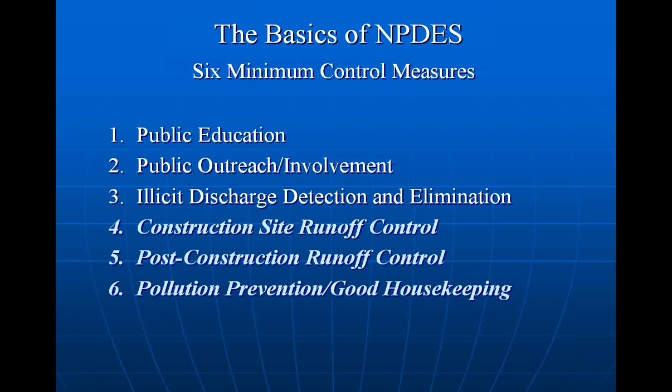We know the NPDES Phase 2 summed up water quality with their 6 minimum control measures, which is public education, public outreach and involvement, eliminating illicit discharges, construction runoff control, post-construction phase runoff control, and water quality being included in that, obviously, and then pollution prevention and good housekeeping.

Low-impact development means a lot of things to a lot of different people. This definition is off of the low-impact development site, and it says that low-impact development is a comprehensive land planning and engineering design approach with a goal of maintaining and enhancing the pre-development hydrologic regime of urban and developing watersheds. This is to be accomplished while meeting the water quality goals dictated by NPDES rules and regulations.

And the two subjects are actually complementary, but it's important to understand, and for those of you who've been here before, I'm going to try to use the highlighter pointer here. This thing has a way of making my menu disappear, but I want you to understand maintaining and enhancing the pre-development hydrologic regime, and this is not as simple as doing detention. So it's something we need to think about.

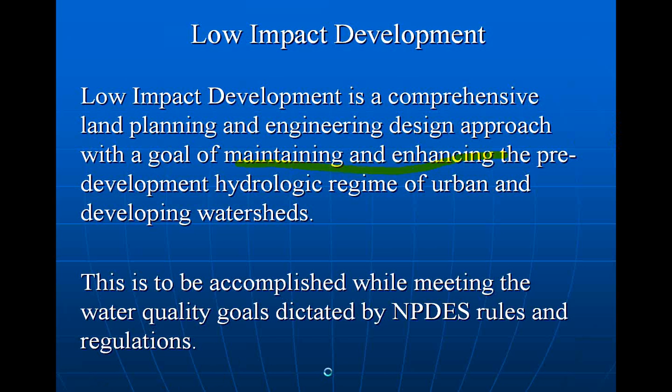So the main goals of LID are to match the pre-development conditions for quantity and quality. For those of you who aren't necessarily familiar with these terms, quantity is the total volume of water that runs off a site. And quantity also can mean the rate of runoff, and we'll break these down a little bit. And water quality, of course, is the contents of the water, which is usually degraded when we develop a site. So you want to have the volume of runoff, which would be maybe 20,000 cubic feet detention in a pond.

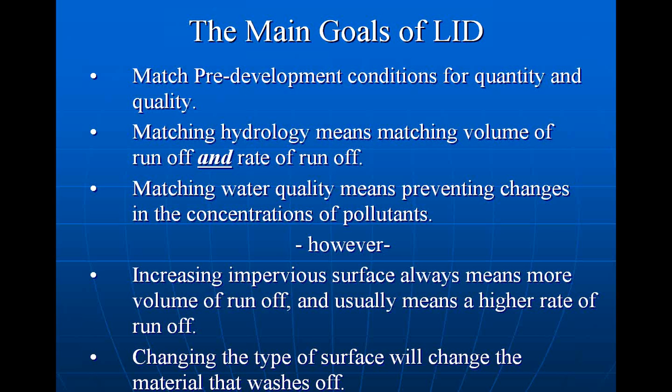You think of that as the volume that you're holding, but really the volume of runoff changes as sites develop, and that's why we have ponds. But the ponds are there to control the rate of runoff. So what we want to do is prevent changes in the concentration of pollutants for water quality. But every time we increase impervious surface, that means there will be more water runoff. I'm going to show you how that's figured. And it also usually means a higher rate of runoff, that the water will run off faster. So changing the type of material of surface, of course, will change the type of material that washes off.

Most hydrologists and engineers believe that about 95% of the water that falls on an impervious surface will run off. Just to take a little short rabbit trail here, they're talking about the annual runoff rate. There's a thing called initial abstraction when we're using a TR55 or SCS method of calculating runoff. And essentially it means that there's water that evaporates when it hits a warm surface.

There's water that's caught on the leaves of trees. Every kid has probably stood under a tree, when it's not lightning, during a storm to kind of stay dry. So the 95% is not every storm every time. And of course, when a surface is saturated and it's a heavy runoff, the runoff is probably closer to 98% or maybe even 100% or close to 100%.

So, in developed landscape areas, about half the water runs off. This would be a constructed lawn where the surface has been prepared and sod was put down. It might be less than 50% for an area that's been planted with trees, might be more on a lawn that was well compacted underneath. But on undisturbed forest land, only about 20% runs off.

So we like to use things called C factors and percentage of runoff, but essentially when an inch of rain falls in the forest, annually about 2/10 of an inch runs off, about 1/5. And it could be as low as 1/10. This is part of the, I would call it art or magic of doing hydrology. Different engineers have different opinions, and they talk about how long the storm takes to run off. But that's why you'll see a variety, and why hydrology is an inexact science.

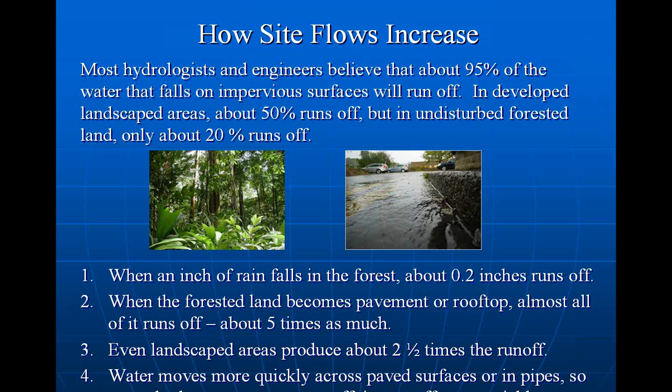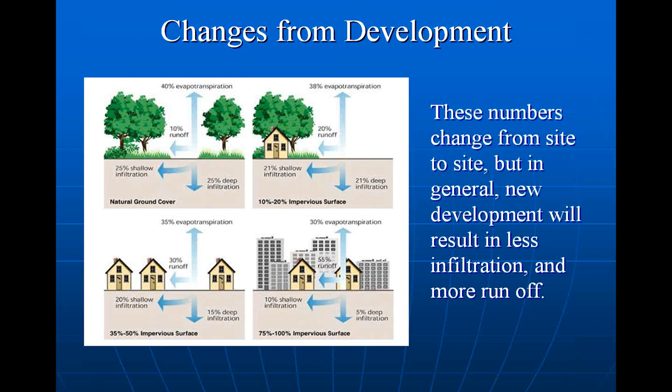Now, through the 70s and 80s and up through even today, we gathered this extra water and we detained it. That's where the word detention pond comes from. Sometimes you'll see detention and retention, and actually they're two different things. A pond that retains the water on site is retention; a pond that detains slows the water down.

This is an example of a pond, and essentially there's what we call a V-notch weir. A weir is an element that controls the flow of water. It could be a broad wall. It can be a hole or an orifice. It could be a standpipe. There's all kinds of things that control flow.

But this particular V-notch weir is done so that as the water gets deeper and there's more volume being stored, that would indicate there's more flow that has come into the pond. The V gets wider, and so more water can flow out. This is a way of what we would call matching the rate of flow. Small storms have small flow, and a V-notch weir with its small area on the bottom would let low flow off.

So you kind of match the pre-development rate of flow. Rate of flow means cubic feet per second, not cubic feet, which would be the volume, or cubic yards or gallons, or however you want to look at it. But the rate of flow can be matched this way. In bigger storms, the pond gets deeper, and the outlet control device allows more water to flow out.

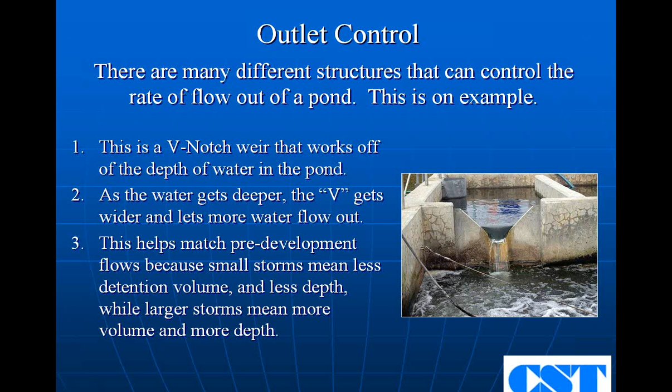There's quite a bit of attention paid on sites to the outlet control structure on a detention pond, to keep the same rate. And why would you keep the same rate? You'd keep the same rate because there might be a culvert downstream, a 24-inch pipe under a street, and you don't want to overload that pipe by having a greater rate of flow. There may be a swale that goes to it. You could have a neighbor that's used to a certain flow coming off of his property. So the requirement to match the rate of flow has been around for a while.

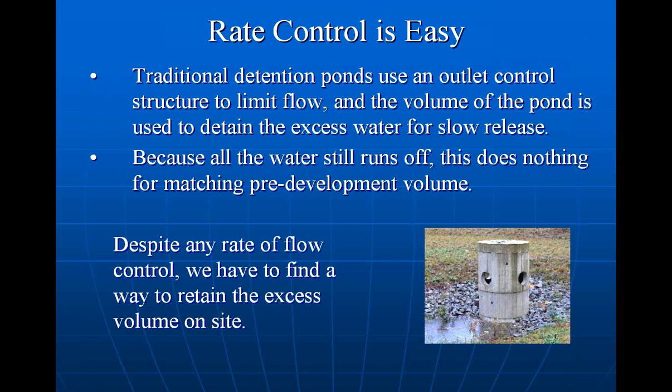And matching the rate control is actually pretty easy because there's vertical slots, there's a thing called a Cipolletti weir, there's circular weirs, there's a lot of ways to use outlet control. And then if you match the rate of flow off the property to the pre-development rate of flow, which the engineer determines using the type of surface and the amount of tree cover and other things, hopefully he gets the rate of flow the same, leaving the property. But because the rate's slower, volume builds up, and that's why we have pond volume. So if we're going to control volume as well as rate of flow, we've got to find a way to use water on site.

So there's another problem, though, with simply matching the rate of flow. You do catch some gross pollutants and some sediments, but even though the rate of flow, let's just say 5 cubic feet per second, matches the pre-development flow, because this pond is storing water and more water is running off, maybe 5 times as much, that rate of flow will last 5 times longer. As that extra volume of flow reaches the stream, it has an impact on the stream. And we'll talk about that a little bit more, but essentially you're putting more water in the stream. You may be putting it in there more slowly.

There's some pretty nice techniques that talk about where you are in a watershed and how long you should hold your water, and whether you should release it over a longer period of time than just strictly trying to match the rate of flow. Also, the amount of time water spends in a pond, if you simply match the rate of flow, is a relatively short period. Let's say a storm lasted an hour, and because it takes 20 minutes for the water to get from the top of the basin to the bottom, the entire flow lasts an hour and 20 minutes. If you've got 5 times the water released at that same rate, you might end up with 5 times the amount of time for that storm to release, say 6 or 7 hours.

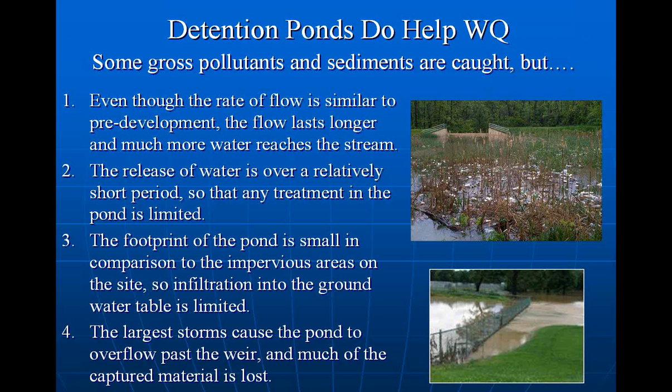When the big storms come, usually you will hold maybe a water quality storm, which might be 1 inch first flush, and you'll hold it for 48 hours. But if you get a 4-inch storm, those last 3 inches go out over the weir. And so the larger storms, when they come into a pond that has low energy, can stir up mud and trash and debris, and so you can lose a lot of material.

So a detention pond, certainly one that's not set up for water quality, can't do anything about the volume of water, 5 times as much. It might not do very much for water quality. In fact, it might even degrade water quality depending on how the pond is built and what the energy gradient is across the weir. So jurisdictions are going to require detention, and it's a good practice. It's the right thing to do.

You want to do it to protect nearby properties and pipes and swales, but it cannot really address water quality problems per se. There are credits given because we watch these ponds silt out and we see them fill with hydrocarbons sometimes and trash and debris, so it's having some effect.

But as a larger percentage of properties develop across a watershed, more and more water reaches the stream. And I say sooner or later. Normal detention, maybe it's 5 times as long as it might have taken to reach the stream before because it was detained. Maybe it's 2 days, but still there will be more volume of water getting to the stream. Also, that water tends to hit the stream faster. Pre-development flows were smaller, but they took longer.

So with pre-development, more of that water is infiltrated into the ground, and we call this a base flow to the stream. This is water that goes into the saturated zone, into the water table, and migrates horizontally to the stream. So you get some stream flows even though it hasn't rained in 2 or 3 days. You'll get some flow support into the stream. So when you get the higher volume of flow into a stream immediately after a storm and almost no infiltration, you get no base flow for the stream.

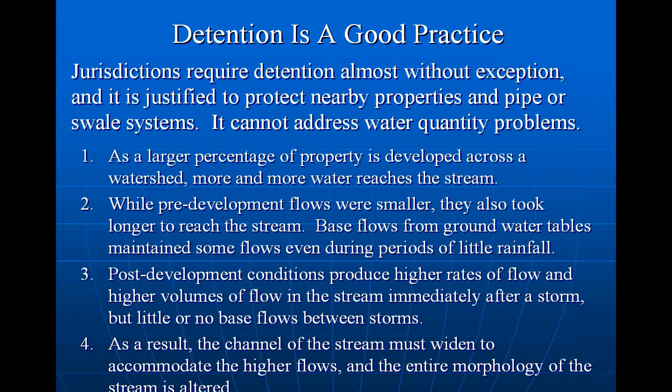So when you get that higher flow for relatively short periods of time relative to what happens when the water infiltrates and goes through the water table, days and days and days to get to the stream, the channel has to widen, and it has to accommodate these higher flows. And the whole shape or morphology of the stream has changed. So rate of flow is not a problem.

In fact, many BMPs have been shown, tested. Now, some of these are manufactured. There are others that have been shown to be very effective. I say manufactured. All of them are manufactured. I use manufactured to mean proprietary manufactured devices. But many have been shown to be able to effectively remove the pollutants that are concerning to us in water quality. But almost none of them address the runoff volume problem, even underground storage chambers and pipes.

Volume is the challenge. So manufactured solutions can help with other problems, but can they help with this volume problem also? It's a physical problem. There's too much water and only a few ways to use it on a site. So if you're going to reuse the water on site, there are some fairly common ways, but you have to be aggressive and effective in your pretreatment. You can't have trash and debris and all sorts of vegetative material and sticks and gravel going into most of these uses for reuse on the site. And you have to accommodate a way to store that water.

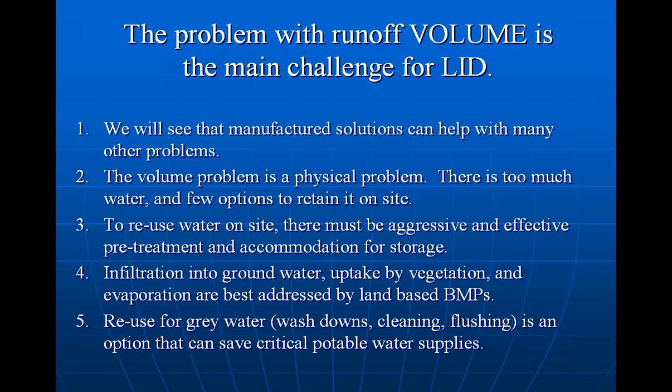So infiltration into the ground, uptake by vegetation, which will then allow the plants to respire, for the water to come out as water vapor, and evaporation are best addressed by land-based BMPs, not manufactured proprietary BMPs. Reuse for gray water, that would be washdowns, cleaning, flushing, and irrigation. These options can help save critical potable water supplies. In other words, all the water you're using for irrigation, flushing toilets, or cleaning or washdown, which goes into the sanitary sewer system, saves buying water that is treated for drinking water purposes.

So here's the challenges. Stormwater is dirty. Rainfall is chaotic. I'm showing a picture of a storm here that's getting some awesome rainfall on the right side and not so much on the left side. And this is the way storms work. It's difficult to control the source of trash and debris when a site's being used by the public. It's also hard to control the flow, to understand what the flow is going to be two properties a block apart, much less a state apart.

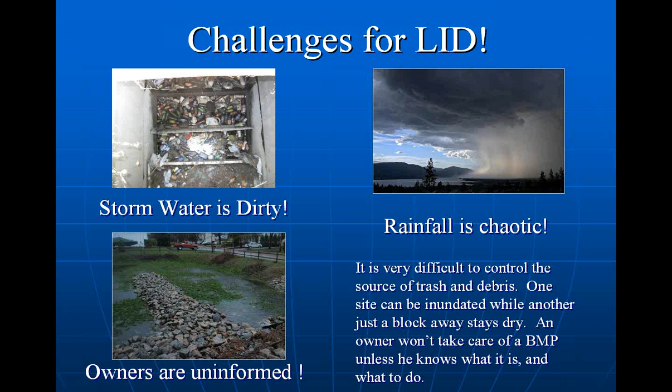And owners are uninformed. Owners don't know what a BMP is, and I could give you many stories about having seen these in the field. They don't know what it is, they don't know what it's for, and they certainly don't know what to do with it. This includes individual property owners and homeowners associations or merchants associations. So going over the stormwater is dirty piece. Whether you're infiltrating, irrigating, or reusing water, you pretty much have similar needs. You want the water coming to them to be free of excessive sediments and gross pollutants.

That's a challenge, but gross pollutants and sediments have proven to be relatively easy to control. This can be done with a manufactured treatment device. There are public domain solutions that can also accomplish this. Sometimes these manufactured devices only have a manhole or two in a parking lot on the site.

They're under an area that has another use. That would be maybe parking or landscape. So it's not using up area like a pond might, where you certainly can't park in a pond. Might not want a landscape in a pond, depending on whether you're trying to plant some hydrophilic plants that'll help out your pond.

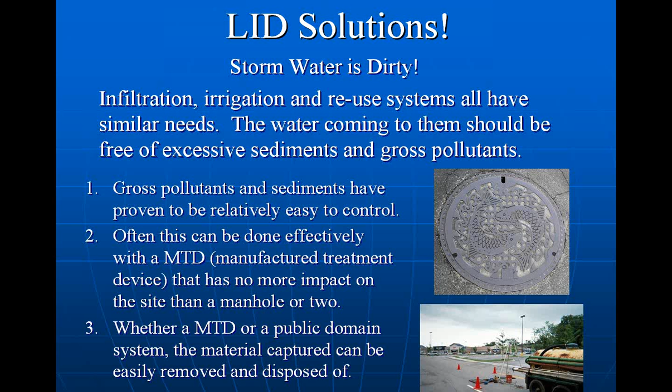But whether it's a manufactured device or a public domain system, if it's well designed, the material capture is pretty easy to remove and dispose of. So there are some things that are extremely hard to clean, like bioretention and constructed wetlands. Rain gardens and some other things might not be so simple if they're impacted with oil and hydrocarbons and trash and other things. Not quite as simple to clean a wet pond, for example, as it would be an underground vault.

So we know the rainfall is chaotic. Infiltration is slow. So when it rains at a rapid rate, rains hard, infiltration can't keep up with it necessarily. Bioretention usually has limited storage before it goes on overflow. And then reuse systems, like a cistern, they have to hold enough water to provide for irrigation and other uses.

It's ironic, a cistern, which is used to irrigate landscape, is nice, but when it gets full from a storm, you just had a storm, and you don't necessarily need the water that day. And when you have a prolonged drought, the cistern is not likely to be full. So you have to be careful how you size a cistern to actually have water when you need it. And there's a lot of techniques where folks are using potable water to supplement the cistern. And if the cistern's full and you get a storm, you're going to, quote, waste that water.

So large storms can be problematic for all of these things. So when these things don't work well because they can't take a large flow, you generally have to go to a detention or some sort of storage where you may have a reuse at another time. Small storms, of course, may not give you enough. And irrigation is a nice concept, obviously.

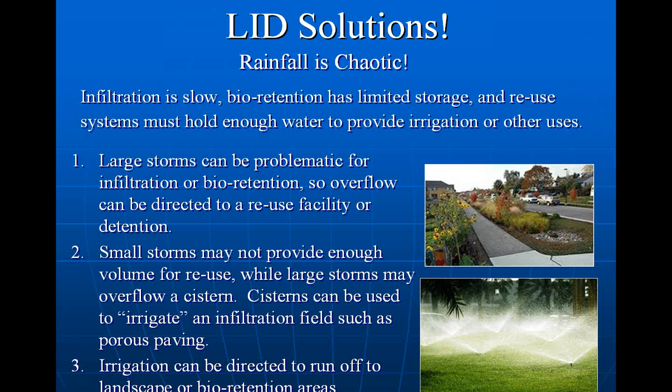There's a lot of things you can do to, quote, waste that water or delay that water and put it into a slow draining system, such as might be under paving. So there's other things you can do with your water to use it as opposed to directly using it for irrigation.

So if you look at the stormwater manuals, I could refer to Georgia or Tennessee, Maryland, Virginia. In most areas, they pick a 1-inch first flush. I think Nashville's 1.14 or 1.2 in Georgia. There's a couple of different things, but what they're looking for is they want to take all of the 1-inch storms and account for 80 to 90% of the rain that falls every year.

Now, I'm using 50 years of rainfall data from Atlanta, Georgia, Atlanta Hartsfield Airport. In that particular database, only 65% of the storms are 1 inch or smaller, okay? When I say 65%, I'm talking about 65% of the annual volume is contained in storms that are 1 inch or smaller.

And you go, well, so 1 inch won't make the 80. But a volume-based BMP, a pond, for example, is also going to catch the first inch of all the storms over 1 inch: 1.2 inch, 1.5 inch, 3 inch, 4 inch. When you add those inches for the larger storms, in Georgia, that comes up, I think, to about 87, 88%. But the point I'm making is on a volume-based system.

Now, most manufactured devices are flow-through, so you can keep that kind of in the back of your mind. That 1 inch first flush is a pretty good approximation of holding 80 to 90% of your water. Let's use 80 as a worst case. If you remember, forested land only has about 20% runoff.

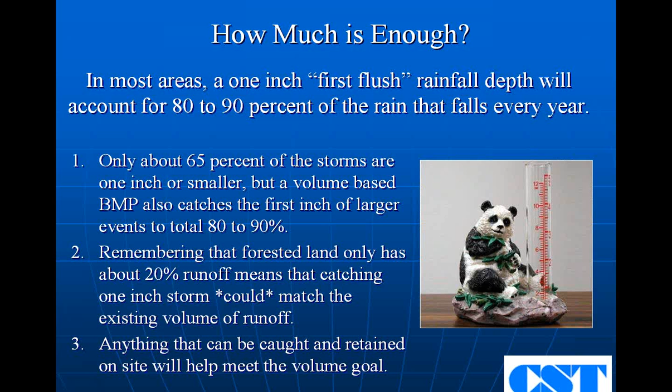So if you did catch 80% with a 1 inch first flush, you could match on an annual basis the existing volume of runoff. That might not be good in individual storms, but the point I'm trying to make is this: our first flush volume is probably a pretty good starting measuring point for what we want to catch, hold, and reuse to duplicate volumetrically what used to happen on the site before it was developed. So anything that can be caught and retained on site can help meet that goal.

There's some simple things. On what I would call tough commercial sites, that would be highly developed hotspots, the rooftop is 30, 40, sometimes even 50% of the impervious surface on the site. The solution of a lot of folks is to take that water and run it across a parking lot. The water is relatively clean coming off of a roof. There's some atmospheric deposition of nitrogen. There's other things, smoke and debris and fly ash and all sorts of things could settle on a roof. But by the way, that also settles on the impervious surfaces like the paving and other things, including landscape.

The point I'm trying to make is that water's a bunch cleaner than most of the water that would run off of a parking lot. Probably not full of trash and debris, and probably not full of vegetated trimmings and material, although a tree over a roof could do that. But that water would be the first water to use to fill a cistern for irrigation or for secondary uses like wash down or cleaning. It could replace potable water, drinking water, which would save some money on an ongoing basis, certainly, if you're not buying the water.

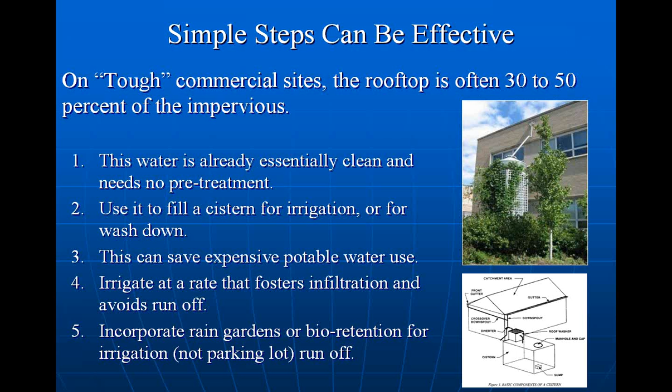And if you had a cistern on overflow, you certainly could direct that the same way you would pump it out on your lawn. You can certainly direct it to a bioretention area or to an in-ground infiltration where you might be able to utilize that water to get the benefits of evapotranspiration and some other things. So there's other places that aren't so simple. I think roofs are pretty simple, really, and they are highly unused.

A lot of good engineers today are carefully piping their roof drains so they don't have downspouts, but you know, the first thing they do is find the nearest manhole and commingle it right back in with the stormwater. Yes, there is a cost associated with some additional piping to segregate that water, and yes, there's some cost associated with storing it. But I've seen many systems where they are essentially storing as clean of water as they can coming from their roof.

And by taking that 30 or 40% off of the drainage system, not only are they doing good water quality, they're downsizing their pipes, they're downsizing their pond. And so this can be a winning proposition, not a losing proposition. Sometimes all anyone can see is another 100 feet of PVC pipe. But the benefits of not using potable water are long-term, and there can be direct, immediate benefits to downsizing the pipe system on a property.

So some of the areas that aren't so simple, this is where we start to look at how manufactured products might be able to help. The water that comes off parking lots can be full of pollutants, and it needs pre-treatment. The things that do really well at storing water and at infiltrating water and using it for bioretention and getting it to plants definitely do not need dissolved metals, hydrocarbons, tons, literally tons.

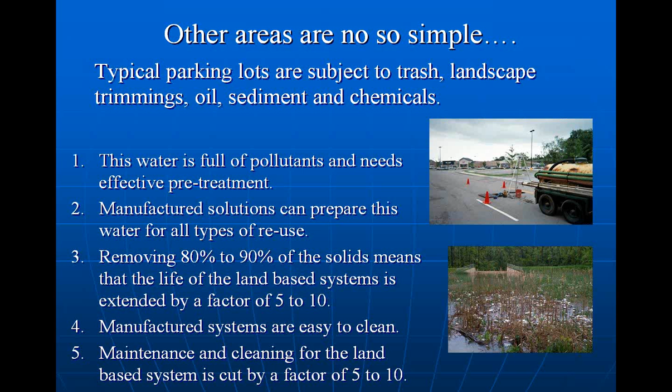So if you're looking at LID and you want to do LID, it's a great thing, because remember, it does the things that a manufactured system cannot possibly do. But the manufactured system can make it work better, can make it less cost to maintain, and suddenly it becomes doable. We don't need somebody publishing 25 to 40% failure of infiltration systems. That might be true, but we need to have a 90% or a 95% success ratio for these infiltration systems that recharge the water table and do again what a manufactured system can't do.

Now, owners also are uninformed, and I could take out owners and put contractors are uninformed. I've seen contractors who were told not even to walk on the surface where there's going to be an infiltration system installed. Maybe, let's say, chambers and gravel over scarified soil that are compacted with a sheep's foot because they're worried about bearing after the system is in, even though the system's been tested and even though the manufacturer's instructions are clear.

So contractors can have their problems, but owners typically don't know the function of BMPs in their site. And we have confirmed this time after time after time. When the plans are being done, there's a checklist that's required and a maintenance schedule that's required. And what I hear out of the jurisdictions often is, boy, we don't have this. We don't have the staff to go inspect these things. The owners don't know they have these things.

Someone's going to make sure their air conditioning filters get changed and the filter maybe in their water cooler inside. They get a little manual with these things when they get their building. They probably hire someone to do that for them. But as far as BMPs, it's a couple of manholes on top of the ground or a pond back there that they don't know that they have duties and responsibilities outlined. Some do, and some do take care of it, but it's certainly not the rule. It's the exception for the people that really take care of that.

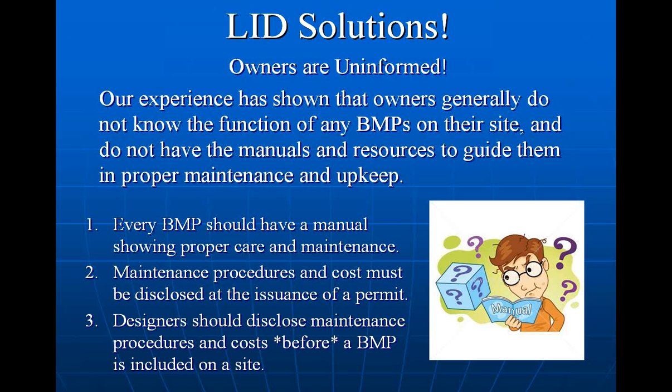You can believe that a part of our sales effort here at Crystal Stream is to explain to people, yeah, they can do something that might not be effective and it might be able to be approved and it might be cheap, but if they really want a good long-term maintenance strategy, they need to pay attention to what's going to happen to that BMP. You know, it's not necessarily to have an army of inspectors out there. Owners can self-verify it at the proper inspection or maintenance interval.

There are cities where we do maintenance, where we take a picture of the front of the building and the address. We take a picture of the BMP. We take pictures as we clean it. We provide a three-party manifest showing we were there, that we hauled it, that we disposed of it. Those jurisdictions require this to be submitted either yearly or every 6 months from the BMP. And they only then have to deal with the exceptions.

And yes, it takes a little bit to get a program like that started. But over time, it becomes like a check-off list for the restrooms at a gas station. If this was checked in July, it was checked in January, it was checked in July, it was checked in January, it was cleaned in July. And these sort of reports are easy to manage. I mean, there's hardly any software out there that can't do a tickler system to remind you when the next maintenance or next letter or next proof of maintenance is required.

And remember, the EPA did not just throw out those minimum control measures in any willy-nilly order. The number one minimum control measure is public education. If you don't have the public aware, and that means the people that own these BMPs, the inspectors can be aware, and the regulators can be aware, and the engineer can be aware, and everybody can have these nice sets of blueprints that are rolled up in a closet somewhere, and nobody knows what's really happening in water quality. So public education is something that should not be left out of this.

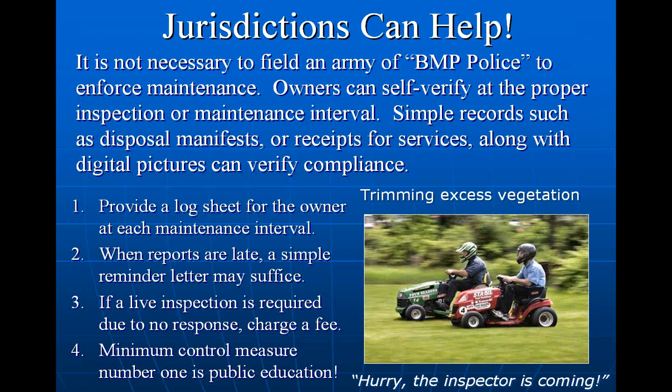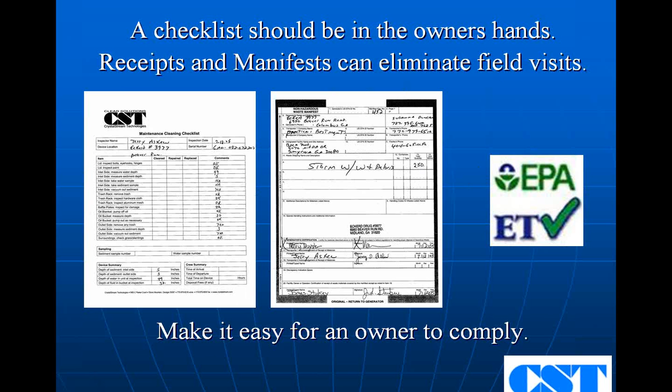And if an inspector comes to that store and goes, hey, are you taking care of your BMP, the fellow can pull out his records. And we also send it, of course, to the state and to the jurisdiction, and we try to get everybody covered on this, keep it ourselves so that everybody knows we did it right.

So here's just a little recap of water quantity with water quality. You've got to address runoff volume first. It's amazing to me today that a lot of engineers get to the end of a set of plans and the end of a pipe and go, well, let's stick a BMP on it that ABC jurisdiction will approve.

First thing on runoff volume is retain and reuse if you can. Not only can you get some LEED points, but the reuse of water on site is coming as a requirement, and you need to get in the habit of looking at that first.

Limit the exposure of clean water to hard surfaces. It's not necessary to run your water across hard surfaces. Limit and protect source areas and disconnect impervious. These are things you all know if you've been around water quality for long. Certainly pre-treat ahead of ponds, infiltration, and bioretention.

The worst case scenario is when you have to hook a CrystalStream unit on the end of a pipe that has no treatment upstream, and you're going to try to get all the pollutants out of moving water. And it's a challenge. And I say worst case, that means you didn't plan. We love to sell the units and you want to get your permit, but if you use a little bit of intelligence up front, including addressing that runoff, you could buy a smaller CrystalStream. Not that we're trying to downsize our units, but I'm trying to point out to you, design is the time to address this and address the volume first.

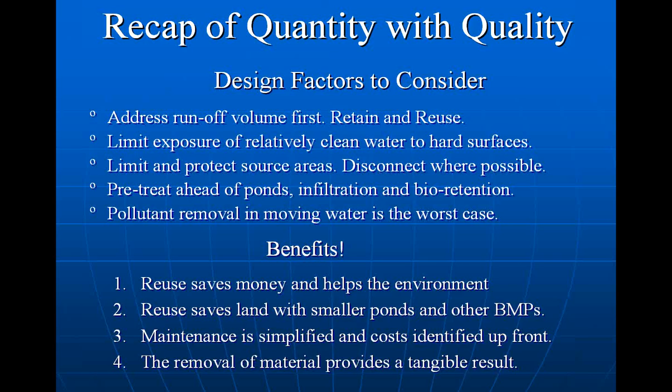So to try to avoid the worst case, every gram of pollutants that doesn't enter a stream or a pond or a downstream BMP makes the job easier. So control your sources. This might be an awning over a truck dock, as simple as that. All the water retained on site reduces the rate of flow and the duration of flow. If you think about that, it's important. Not only do you make your pond smaller, you're helping your stream.

And in the removal process, slower is easier. So once again, you reduce the flow and your BMPs are going to work better. So don't ignore the design factors when you're sitting down and beginning work on the site. That can make your design process easier, but there are tremendous savings of scale that are long-term savings here.

I don't want to make light of or de-emphasize the role of the owner, but sometimes as a designer or as an engineer or an architect, you kind of need to lead the owner a little bit and say, hey, we're going to come with this plan. This plan is going to cost you $30,000 more, but it's going to save you $500 a month, and this is a 5-year payback, or whatever the number, that's 60 months. I think I got that pretty close to right.

And then the savings go on, and not only that, you'll have more land because your footprint is smaller, and you'll have less maintenance because your pond will last longer. So there are a lot of BMPs that can help you.

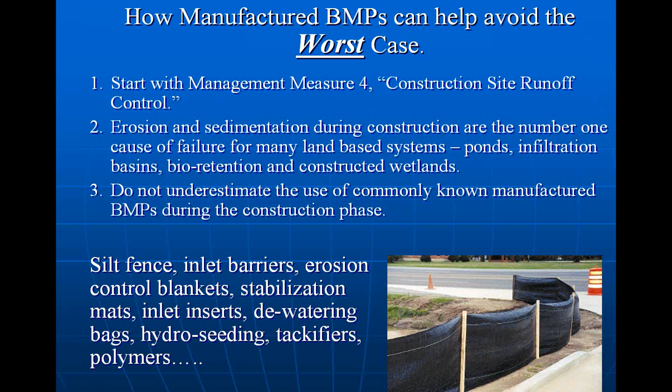But first things first, don't ignore the control of sediments during the construction process, because all of those sediments, especially anything that gets down into an infiltration area, can have a huge impact. So you want to stabilize with erosion control, which means don't let the soil get loose, as opposed to sedimentation control, which means let's try to control it.

Now that it's gotten loose, let's try to stop it with a siltation pond. There's some things you can do to keep pollutants out. You know, drum pallets, cisterns. I've mentioned the overhang over the roof. There's a lot of things you can do to stop those pollutants getting into the water, which means it's going to be easier to work on water reuse, especially if you want to do things like flushing toilets and keep nutrients out of water, some other stuff.

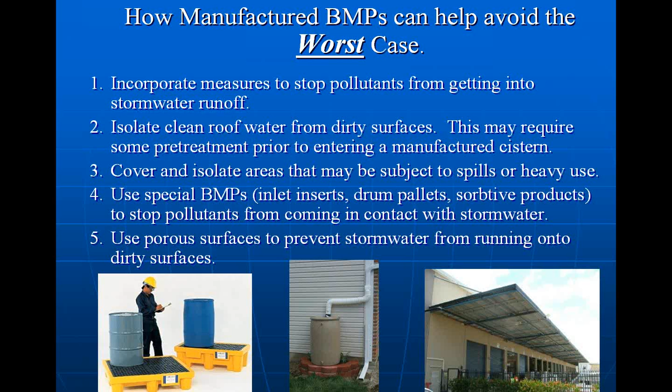And you can use porous surfaces to keep water from running on. There's two ways. You can have water run off of pavement, or you can have water run onto pavement. And so you want to be careful about how you design and which way your water's moving. And each one of those has their advantage, by the way.

You want to pre-treat because the things that can handle infiltration, bioretention, and long-term storage, they accomplish what no flow-based unit, similar to what we do, can do. But they are not good at trash, debris, and other things. So if you start thinking about pretreatment and the right way to apply, remember there are a lot of folks that want to take a test, like I've had a federal ETV test, and I've got another test by the Clean Water Management Trust Fund that said we got 96% of sediments out, and declare it good water quality. Well, for flow-through treatment, it is.

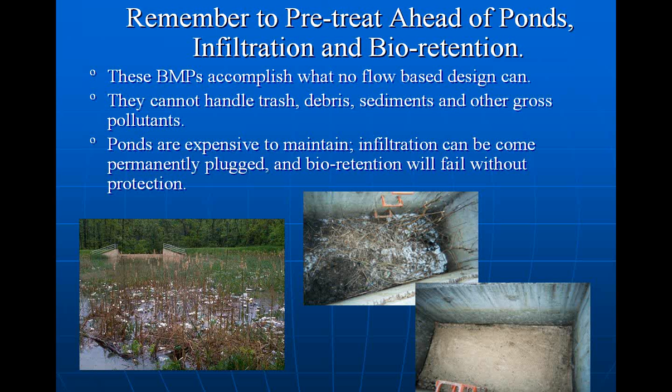But there's more to it than that, and I'm hoping I'm exposing a little bit of that to you, because believe it or not, the fellows in my industry are the guys with the most data that see the most sites, see the results of pretreatment or no pretreatment on the most sites. So there's one other piece. These are post-treatment BMPs, where your water is essentially clean and you need to polish it.

I use X-Tex. That's a proprietary fabric that's made, distributed by Ultratech. We use it to polish water after we have treated it. It's good at getting out metals. It's good at getting out oil. It also, if you put it in a catch basin insert, will clog with mud and vegetated debris immediately, if not sooner. Doesn't last very long. It lasts a long time at the end of a treatment train.

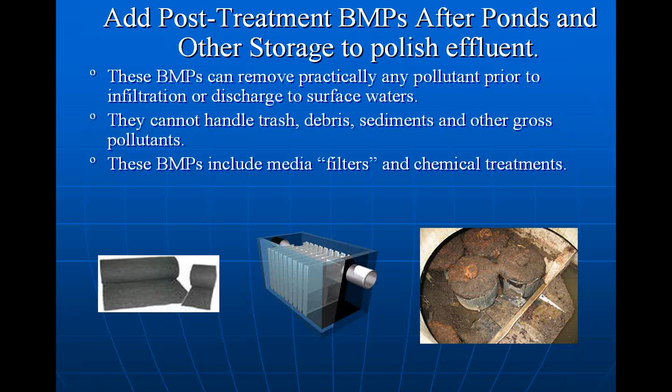The canister treatment devices are excellent. They're full of media. It's gravel-sized media, so it's not much at getting out really small particles. But it has a tremendous capacity, if it's kept clean, to remove dissolved pollutants and nutrients and other things from the environment that, once again, you're never going to settle out with a separator-type device.

So here's my summary for this. If you aggressively design for water quantity, the volume, you can effectively accomplish a lot of the water quality, and you get a lot of water quality benefits in a lot of cases. If you have no runoff leaving the property for some storms, you're able to store it using your cistern, put it on your lawn. You get some deep level infiltration. You get some evaporation. The grass grows. That means there's no pollution leaving the property for those storms. You have a 100% pollutant removal rate at that point.

Remember that detention doesn't really address water quantity. It just holds the water for an amount of time. But if you can reduce that volume going into the detention pond, that again, controlling quantity, you can make it smaller and you can make it easier to maintain.

Remember that stream base flow and groundwater needs to be addressed two ways. You don't want to put a lot of pollutants into a groundwater table that's close to the surface and get those to mobilize. But you need to address keeping base flow and groundwater flow if you can. And infiltration can help if the water is clean going to that infiltration filter. Once again, each little BMP, each one of these things has their place.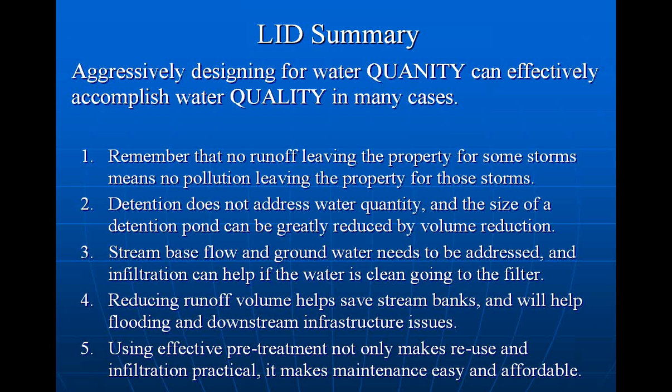But you've got to understand the effectiveness of pretreatment. First of all, we do have a practical system. They're flushing toilets with it, and they're irrigating their landscape with it. It has higher maintenance than it should because, again, some changing conditions after the system was put in. All this can be addressed either with more frequent maintenance or alleviating those conditions. So pretreatment is something you definitely should think about.

And, of course, doing construction, you have to remember that open land is the enemy that can erode. And there are all sorts of products that are out there, hydroseeding and all sorts of things that can help you protect open land, but try not to have too much open surface at one time. Physically controlling the water is essential.

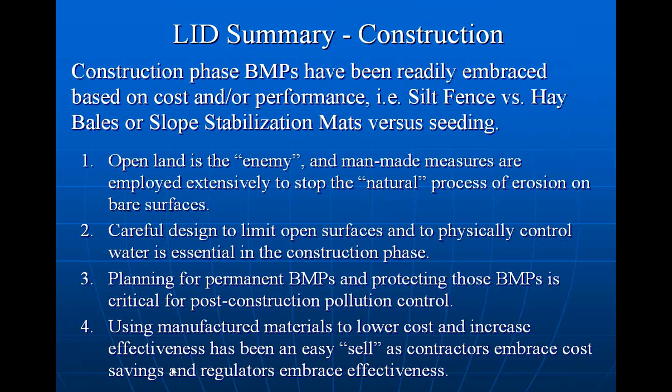And then plan for the permanent BMPs that are going on those sites and protect those areas during the construction period. And you can use a lot of manufactured materials to lower your costs and increase the effectiveness. For example, silt fence and other things. You have to be careful, again, to try to look at controlling the erosion and not necessarily only trying to control the sediment.

So a lot of post-construction BMPs haven't been really embraced based on cost and performance. A lot of people want to see open land, and they see man-made measures as an unnatural solution. Oh, you're not green because you're concrete and aluminum. But

if manufactured devices could cut down the size of a pond by, say, 50%, reuse of water, that land can be left as a riparian buffer. It can be left as a vegetated area, perhaps with some pedestrian features, a gazebo, a picnic table, whatever. So you can have more open land and have a smaller footprint by using some man-made measures as a green solution.

I have to say there's the public testing that's out there on a lot of public domain solutions. They don't do very well in field testing, but there's a couple of reasons for that. First of all, they're usually poorly maintained, and there's not enough control of the design of the energy of the water in large storms as it enters and as it exits. But despite that, these solutions are flat rated as 80%. It's good. If you've got a wet pond that's this shape, you're good.

As a site designer, and as a protector of a watershed, you have to understand that's nice. The fact that I would get approved in some cities, flat rated, full treatment is nice. But you've got to put some more thought into the long-term maintenance and impact on both the streams and the owners and the cost of maintenance.

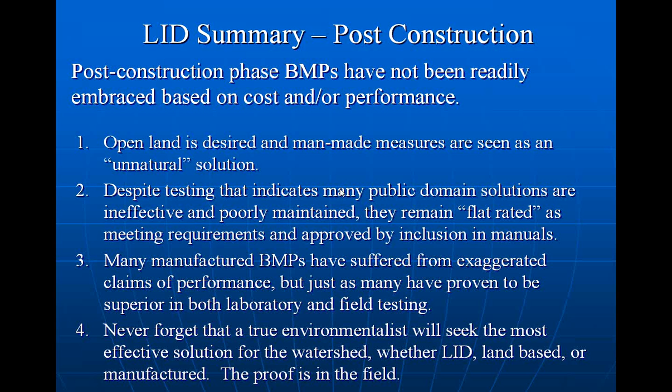So I'm not just sitting here saying, hey, you use one or use the other. I think I've tried to explain as thoroughly as I can that volumetric control is important and it's difficult. Manufactured units can help that, and if you're really serious about doing a low impact development, you look at that long life cycle cost, you look at the overall long-term cost of operating a system like that, and what your maintenance is going to be, and the ease of operation for your owner.

And there are places for manufactured systems in LID. In fact, they probably belong in most of these systems as an adjunct to the baseline of trying to get that volumetric control in there, match pre-development conditions, and have as good a land-based system as you can.

Jeff, you still with me, buddy? Yep. Thank you very much, John. We have a couple of questions, and if anybody else has some questions, please feel free to type them. At this time, we'll open the question and answer session.